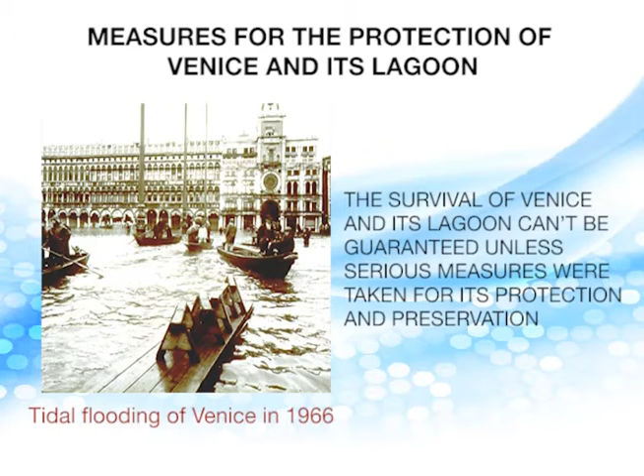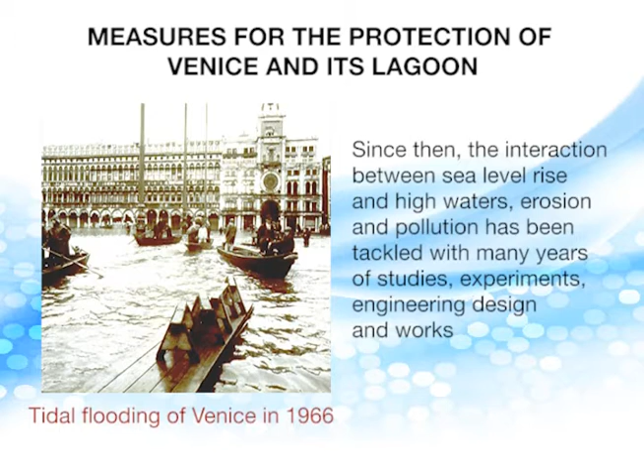Since then, the interaction between sea level rise and high waters, erosion and pollution has been tackled with many years of studies, experiments, engineering design, and works, by means of specific legislation and thanks to considerable funding from the Italian government. In 1984, with Special Law

798/84, the Italian government appointed a state concessionaire, the Consorzio Venezia Nuova, to implement all measures needed to protect Venice and its lagoon, to restore the hydrological equilibrium of the lagoon, to block and reverse the process of environmental deterioration and to eliminate its causes, to reduce the height of tides within the lagoon, to protect the urban centers from the devastating effects of flooding.

All this means restoring and conserving the lagoon ecosystem, as well as monitoring and managing its evolutionary trends. In the context of its commission, the Consorzio Venezia Nuova appointed Technital SPA to perform the definition of the intervention scheme, the planning and supervision of all field investigations and monitoring campaigns, the planning and coordination of all specialized studies performed by others, the planning and supervision of mathematical and physical models performed by specialized laboratories, the preliminary and final design of all works and interventions.

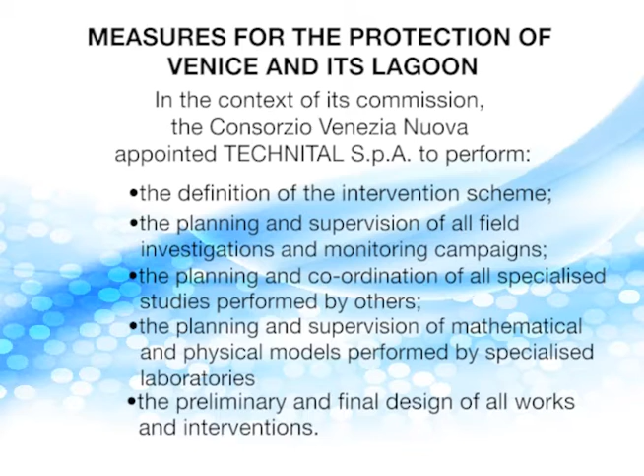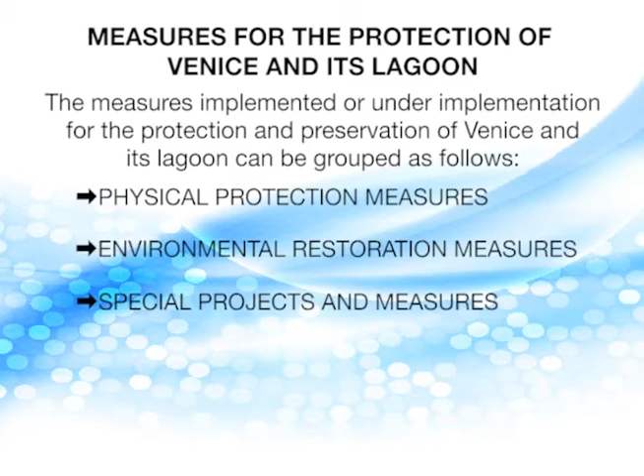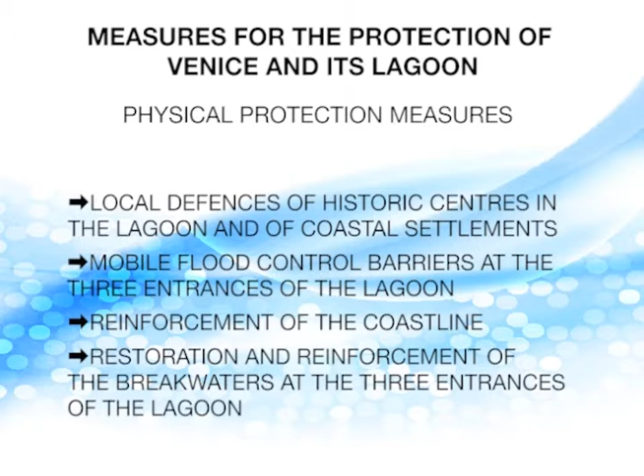The measures implemented or under implementation for the protection and preservation of Venice and its lagoon can be grouped as follows: physical protection measures, environmental restoration measures, special projects and measures. Physical protection measures. Local defenses of historic centers in the lagoon and of coastal settlements. Mobile flood control barriers at the 3 entrances of the lagoon. Reinforcement of the coastline. Restoration and reinforcement of the breakwaters at the 3 entrances of the lagoon.

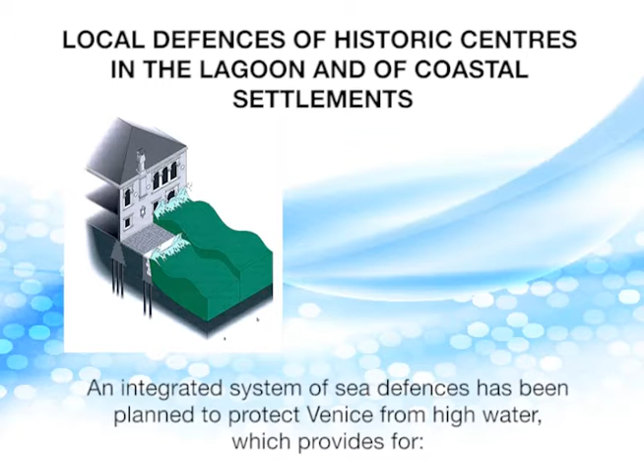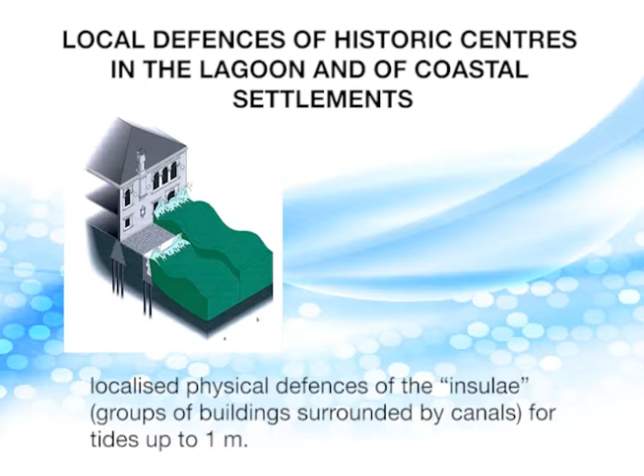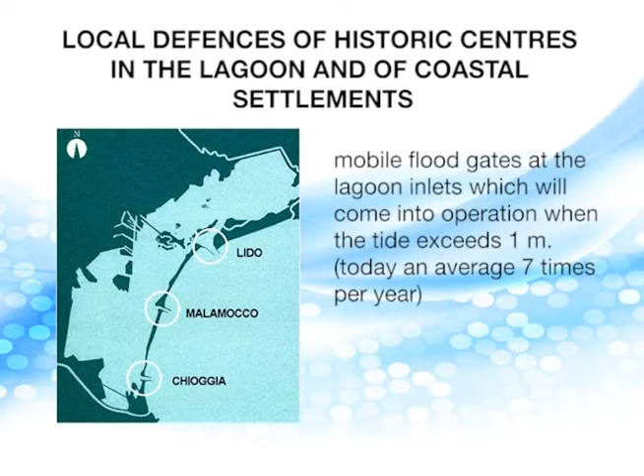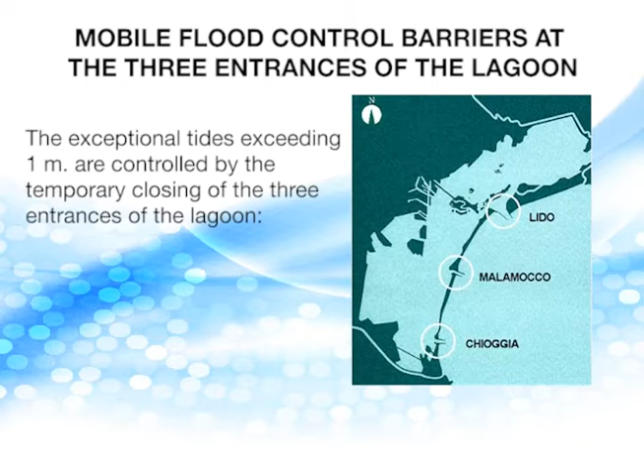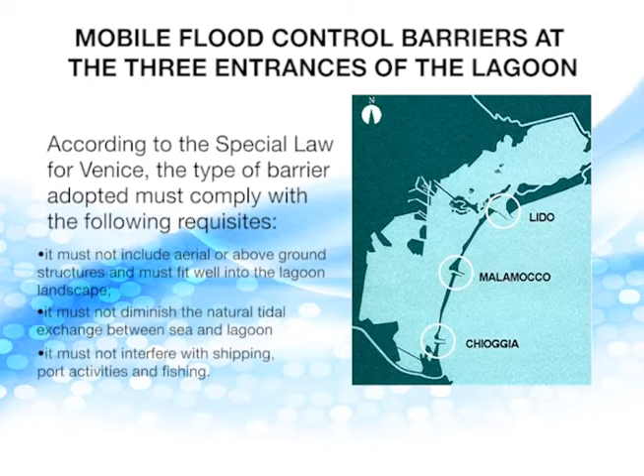Mobile flood control barriers at the 3 entrances of the lagoon. The exceptional tides exceeding 1 meter are controlled by the temporary closing of the 3 entrances of the lagoon: Lido, Malamocco, Chioggia. According to the special law for Venice, the type of barrier adopted must comply with the following requisites: it must not include aerial or above-ground structures, must fit well into the lagoon landscape, must not diminish the natural tidal exchange between sea and lagoon, and must not interfere with shipping, port activities, and fishing.

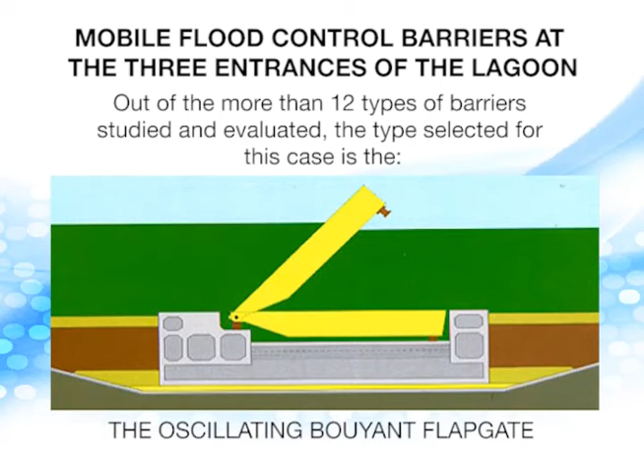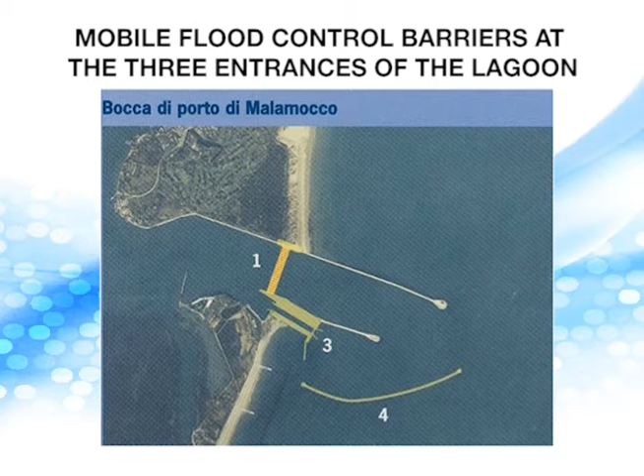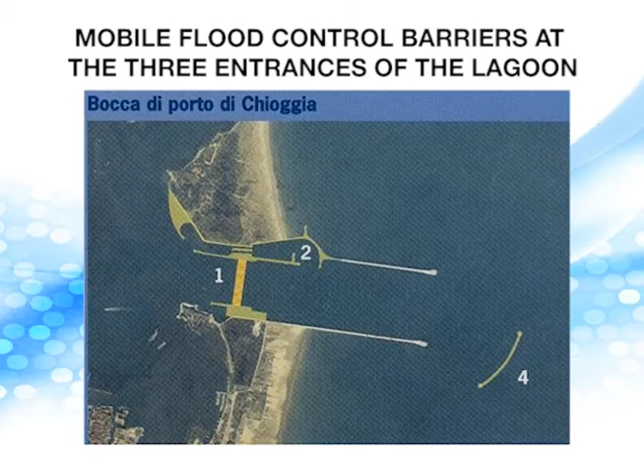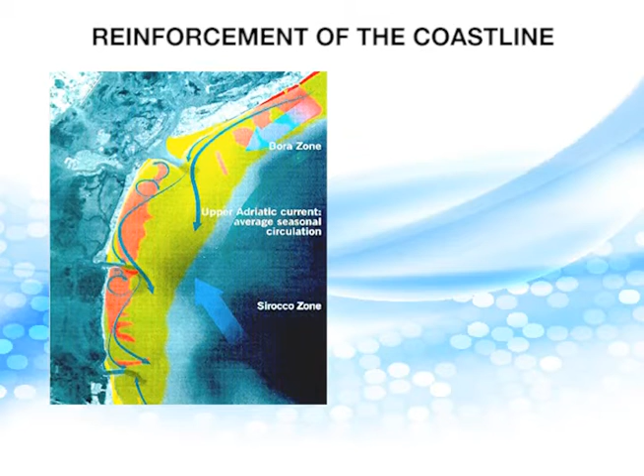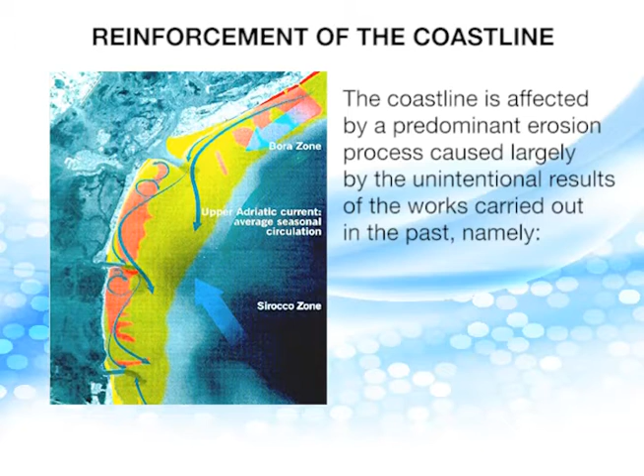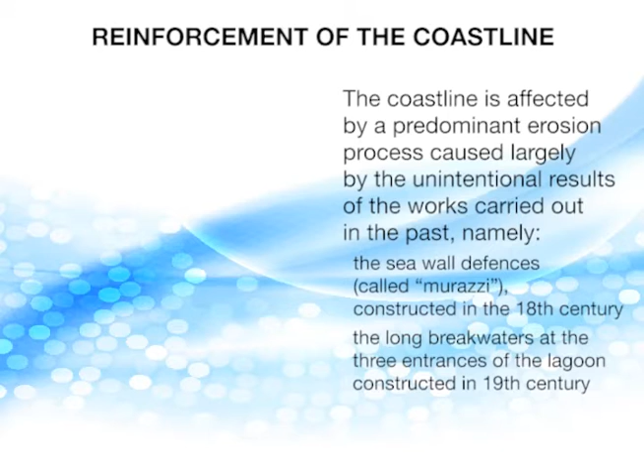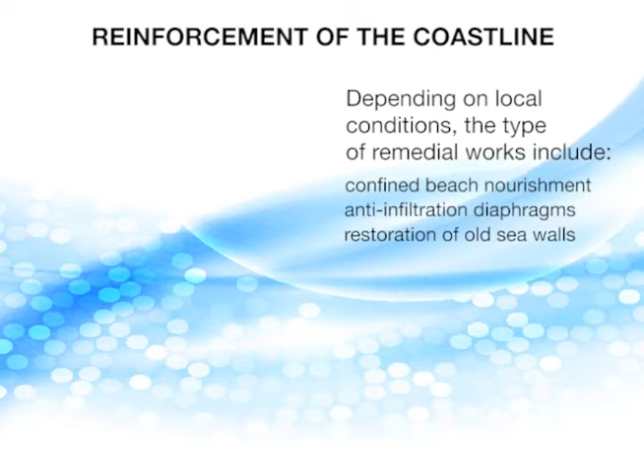Reinforcement of the coastline. The coastline is affected by a predominant erosion process caused largely by the unintentional results of the works carried out in the past, namely the seawall defenses called murazzi, constructed in the 18th century, and the long breakwaters at the 3 entrances of the lagoon, constructed in the 19th century. Depending on local conditions, the remedial works include confined beach nourishment, anti-infiltration diaphragms, restoration of old seawalls, reconstruction of sand dunes. The plan covers 60 kilometers of coast between the Piave and Adige rivers and is the largest ever carried out in Italy. View of Pellestrina coastline.

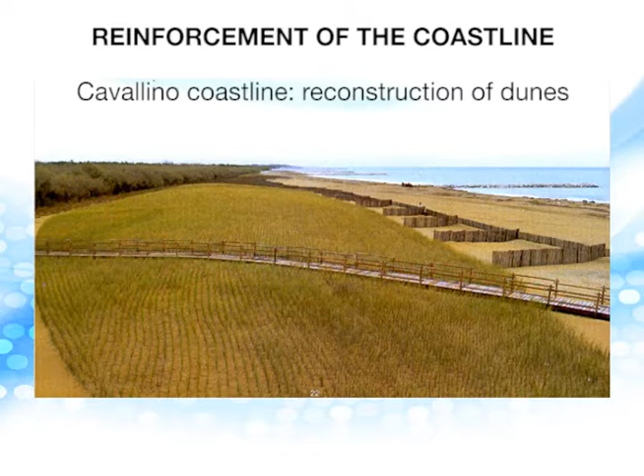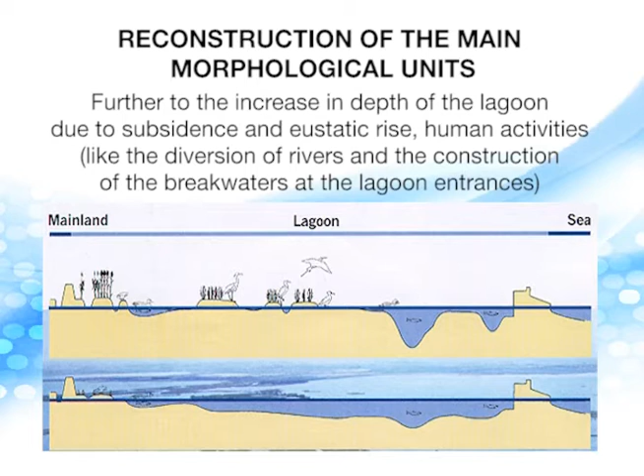Cavallino coastline. Reconstruction of dunes. Reconstruction of the main morphological units. Further to the increase in depth of the lagoon due to subsidence and eustatic rise, human activities like the diversion of rivers and the construction of the breakwaters at the lagoon entrances have inverted the silting tendency too and triggered an erosion process that is transforming the lagoon into a sea environment.

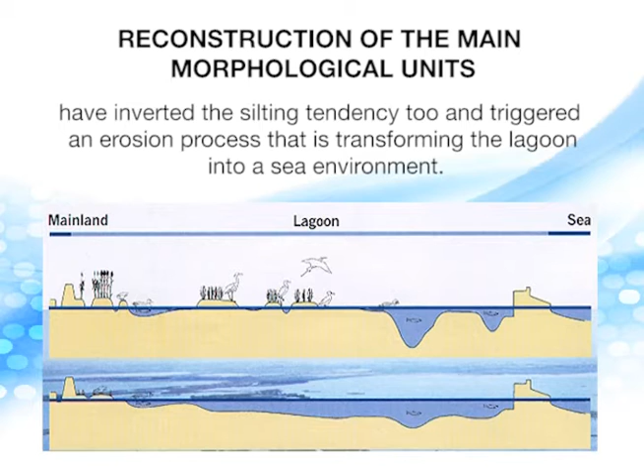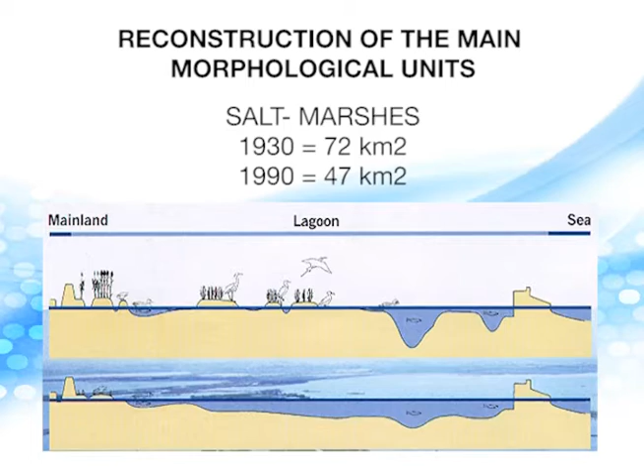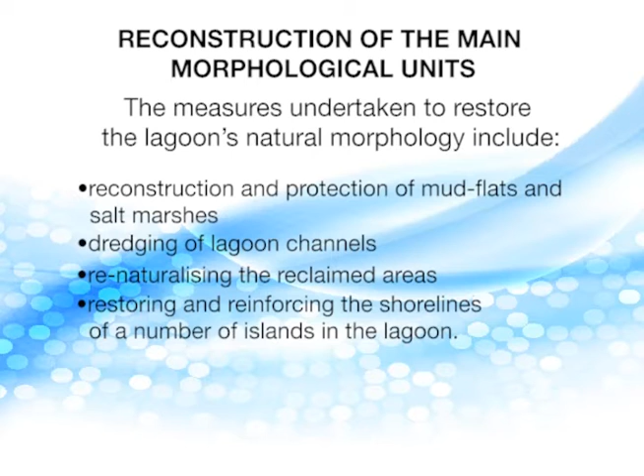The measures undertaken to restore the lagoon's natural morphology include reconstruction and protection of mudflats and salt marshes, dredging of lagoon channels, renaturalizing reclaimed areas, restoring and reinforcing the shorelines of a number of islands in the lagoon. Reconstructed salt marsh, environmental restoration measures, reconstruction of the main morphological units, arrest and reversal of the environmental deterioration process.

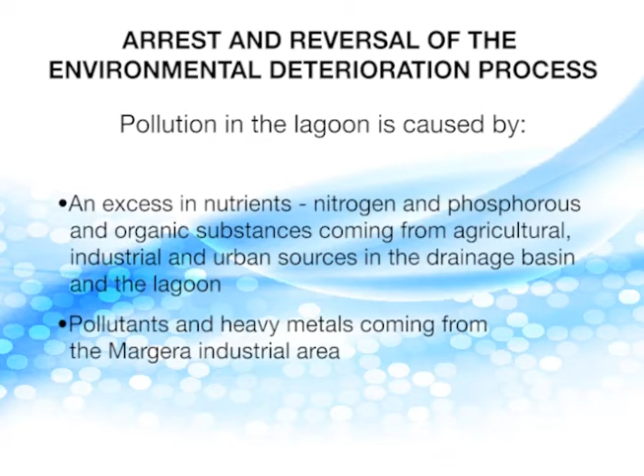Pollution in the lagoon is caused by an excess in nutrients, nitrogen and phosphorus, and organic substances coming from agricultural, industrial, and urban sources in the drainage basin and the lagoon. Pollutants and heavy metals coming from the Marghera industrial area. Today, the following pollutants are discharged into the lagoon. Phosphorus, 800 tons per year. Nitrogen, 7,000 tons per year. BOD5, 4,700 tons per year.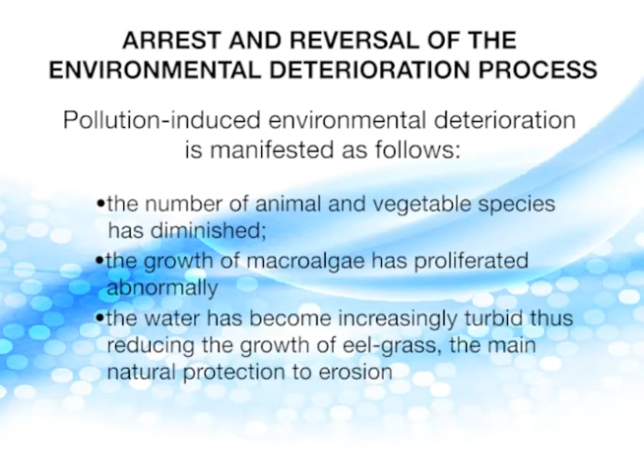The restoration of the trophic equilibrium in the lagoon can only be achieved by reducing the overall pollution load by 70%. To do this, all known sources of pollution need to be kept under close control in order to enhance the natural self-purification capacity of the lagoon.

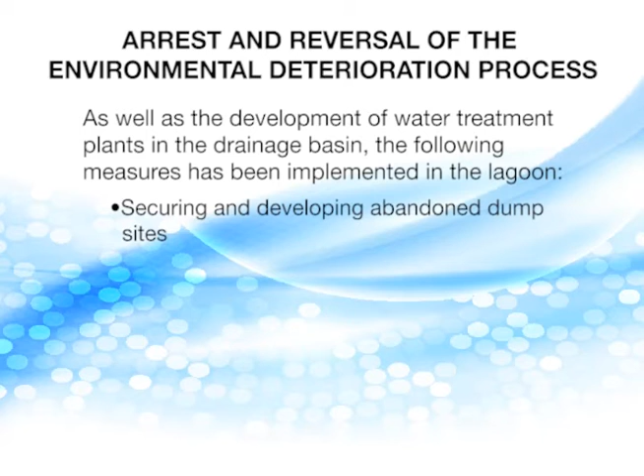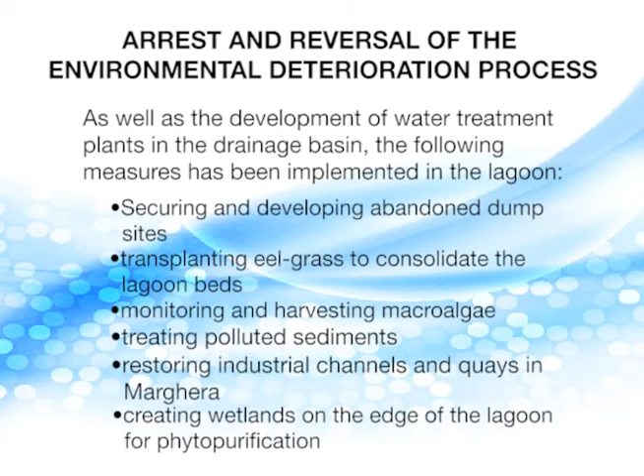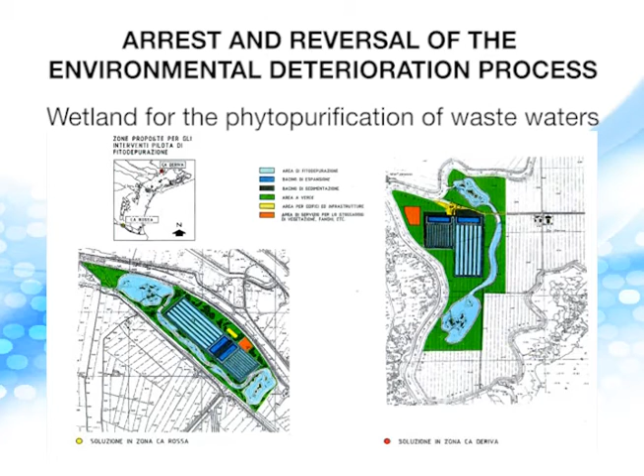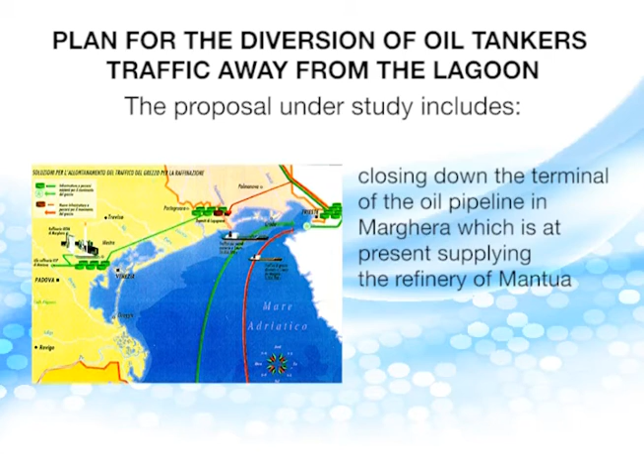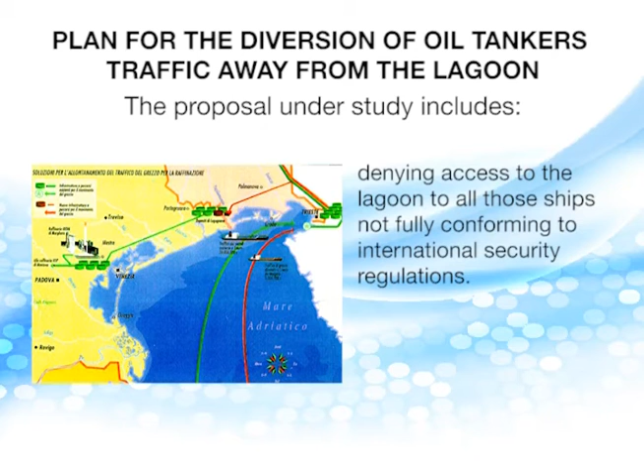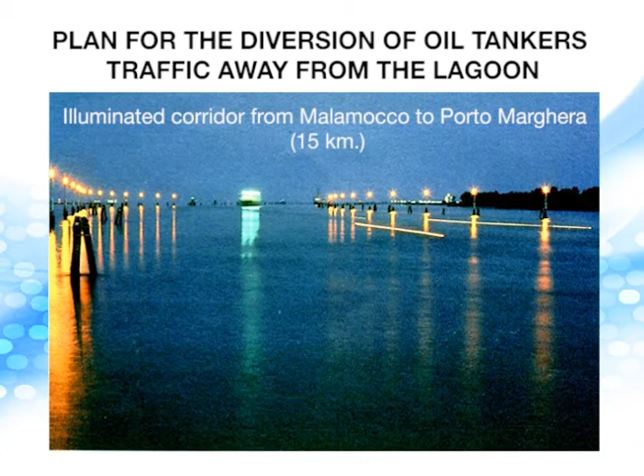Plan for the diversion of oil tanker traffic away from the lagoon. The proposal under study includes closing down the terminal of the oil pipeline in Marghera, which is at present supplying the refinery of Mantua, reorganizing the production and transportation of oil products in the whole Adriatic region, denying access to the lagoon to all those ships that do not fully conform to international security regulations. With these actions, the oil tanker traffic in the lagoon will be reduced by 20%. Illuminated corridor to guide ships into the lagoon in poor visibility conditions.

Technital, which is the sole engineering firm entrusted by the Consorzio Venezia Nuova with the planning and design of these works, has spent more than 3.5 million hours of specialized engineering on this project and has developed a particularly valuable know-how in this field, which can now be fruitfully applied in many similar cases around the world. The total value of Technital's engineering contract is in the range of $180 million.